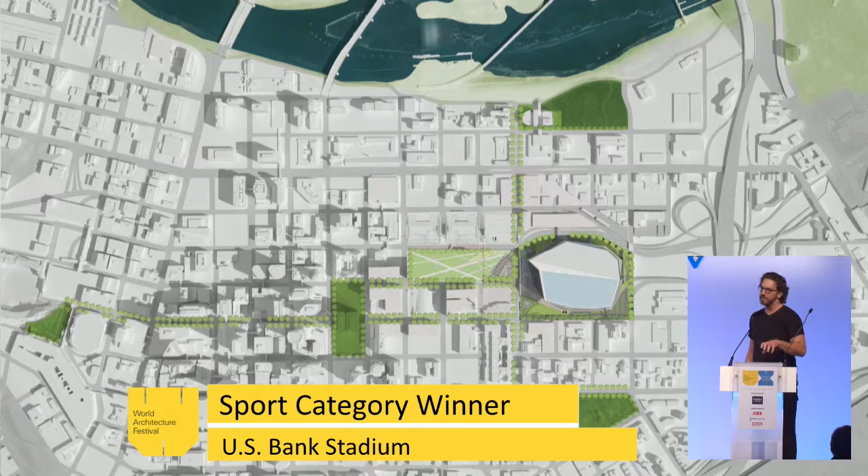But with that, it also had an amazing location and opportunity where we were located on the eastern edge of the downtown core. We could really utilize this project as a chance to revitalize and renew that area of downtown. We develop projects through two separate avenues of research. Market research, where we look at demographics to right size the building and make sure that we have the accurate seat count. And this idea of brand research, which I'll touch on throughout the presentation.

As I said, the project givens: we were designing this building for Minnesota, Minneapolis, but also the Vikings. And through a series of research topics, what we really tried to distill down to was the essence of what was important for this community. It was really about building a stadium that had the essence of the people in mind, knowing that it was home to very diverse and influential people.

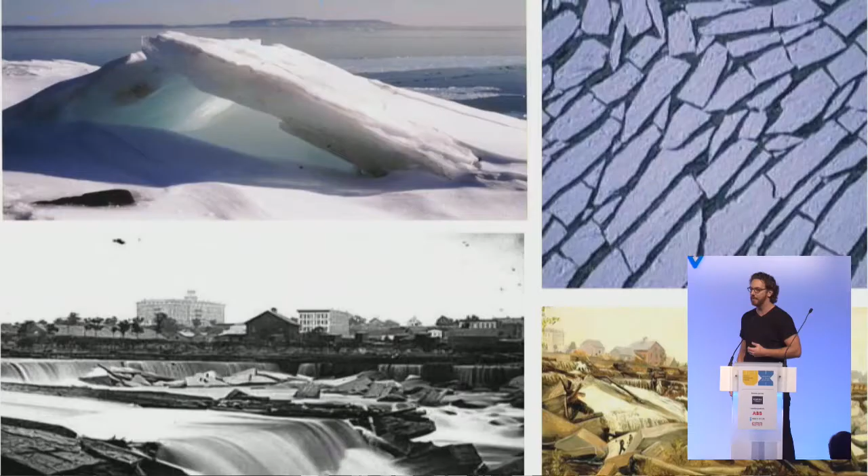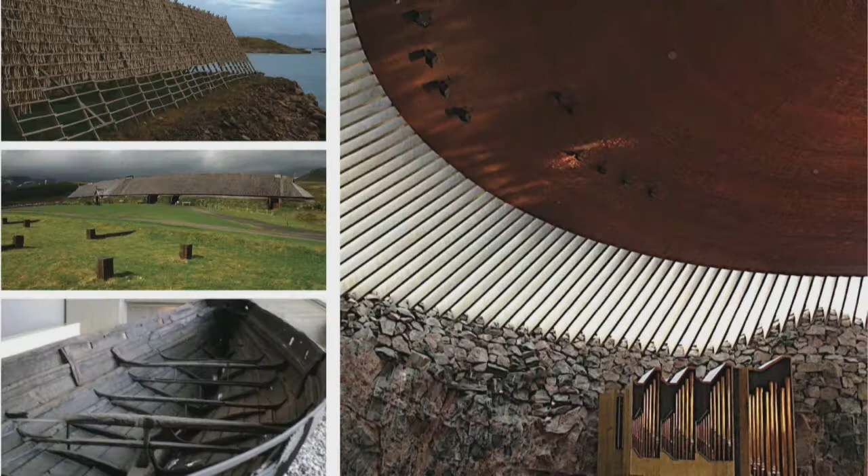And so what we did was we looked at the fabric of the city itself. It has a very rich architectural history in Minneapolis. But it also has a strong geography and geology as it relates to its proximity to the Mississippi River, and also the way that ice forms and breaks apart through the winter and the spring. But also looking back to the old world, knowing the influence of the team itself and where they came from.

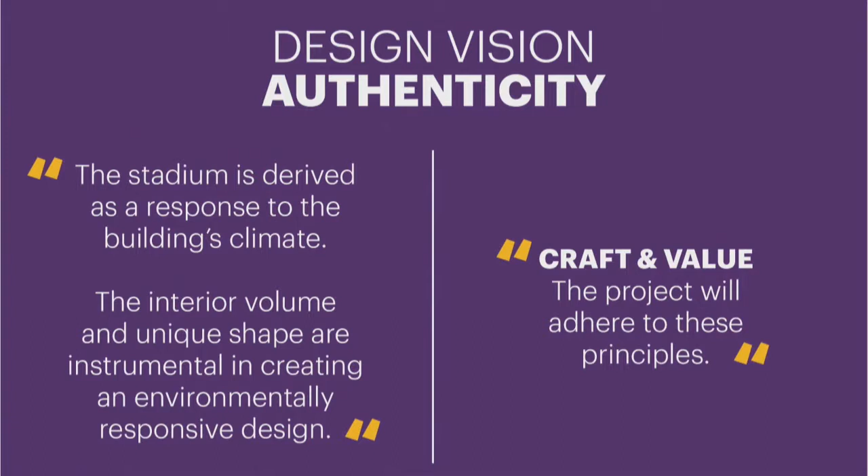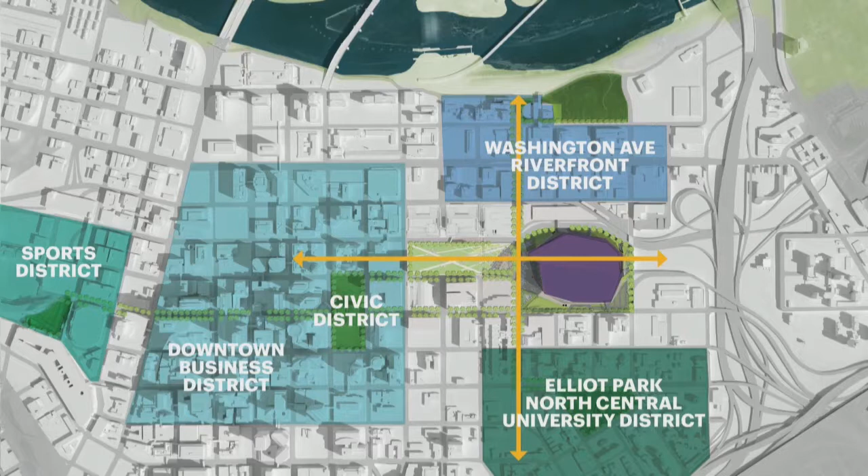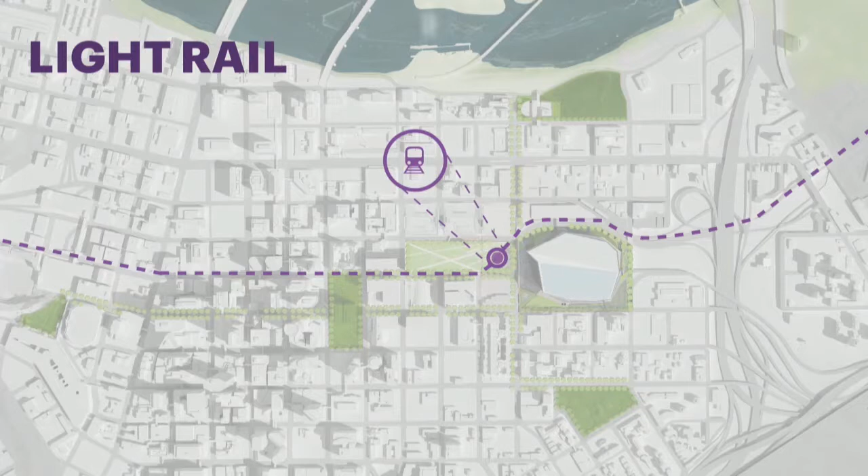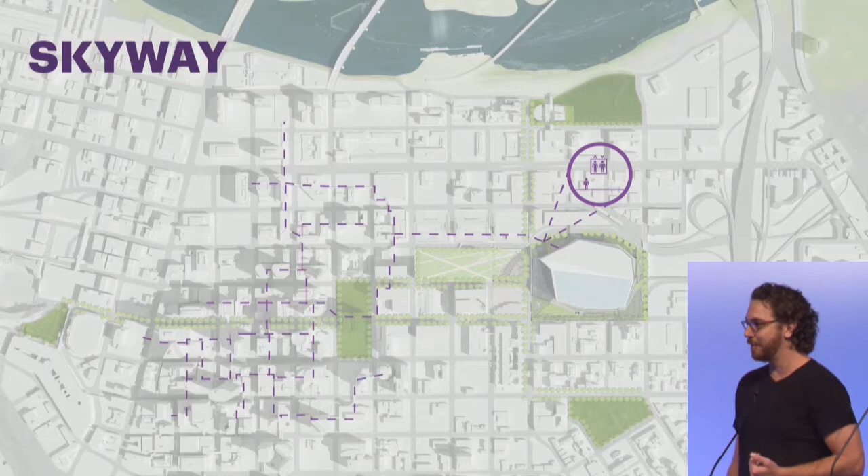And so through that vision, what we decided was really important was this search for authenticity in the design through avenues of craft and value, but also a way that we could link the city together. We could link the downtown core to the stadium in a series of axes, link the park neighborhoods together with the stadium to the waterfront edge, but also really integrate into the light rail system of Minneapolis, and the Skyway, a series of 8 miles of elevated walkways that allows patrons of the downtown core to travel through the city without having to step outside when it's -10, -20 outside.

And so the form of our building was really derived by 4 main things. The first one was really dealing with this climate. The number one thing for us was, how do we get the snow off the roof? How do we manage the problem with snow on the roof? In the existing facility that the Minnesota Vikings played in before ours, a traditional stadium form, the roof collapsed due to the snow loading.

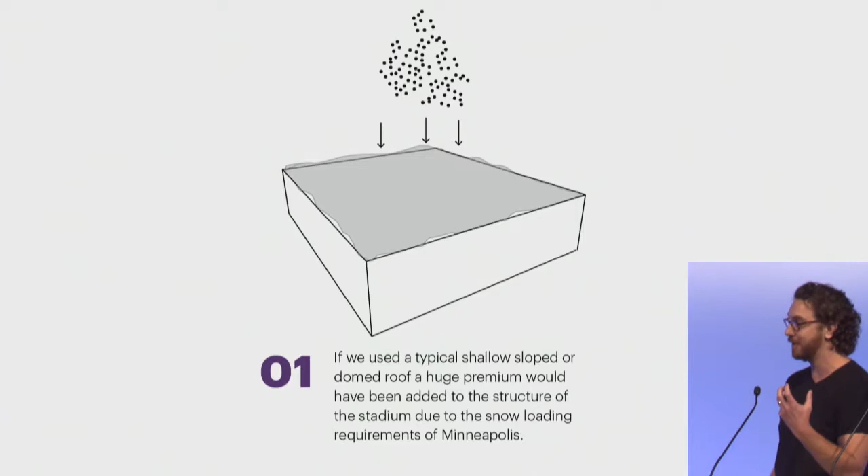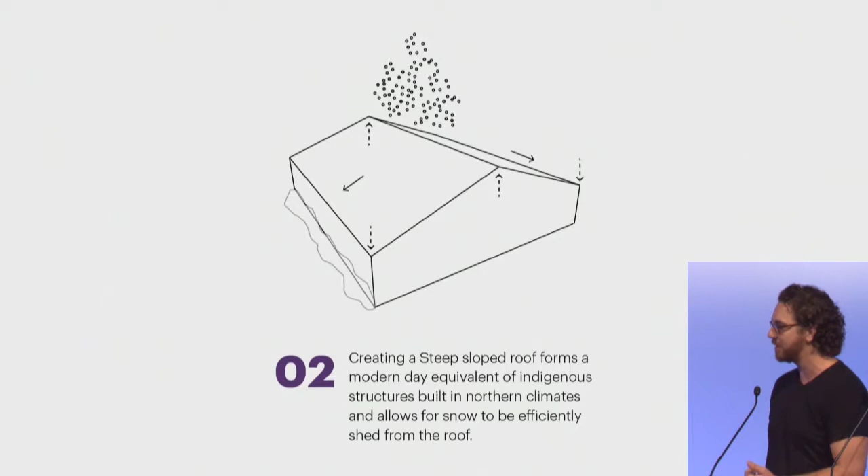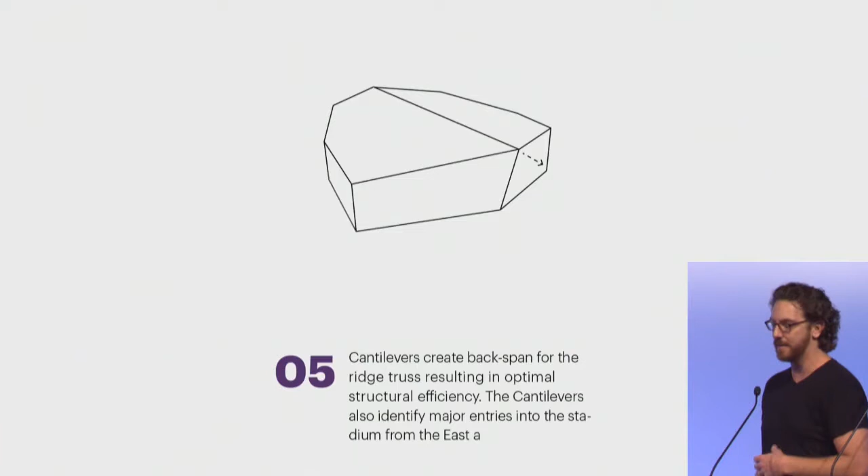So for us, it was a way to manipulate the form in a series of simple moves, looking back at the way you would traditionally design a structure in a harsh winter climate, to redirect the snow, maximize the southern exposure of the roof, and redistribute the snow towards the edges of the stadium. Knowing that we didn't want the snow to fall onto the ground, we created a series of catchment basins around the stadium that can collect and hold it. It manifested itself into a truly unique statement architecture, but one founded in pragmatic principles.

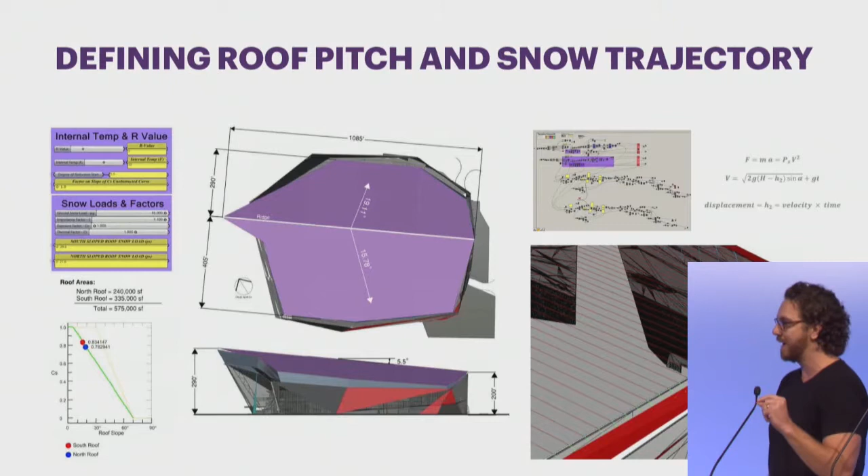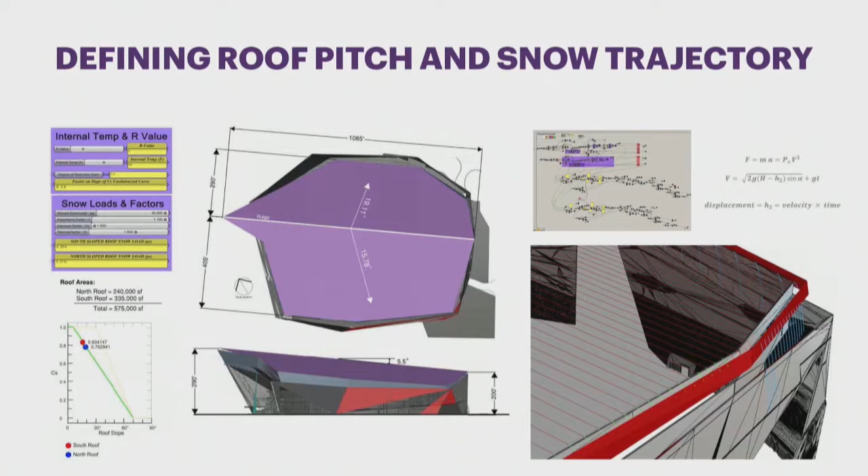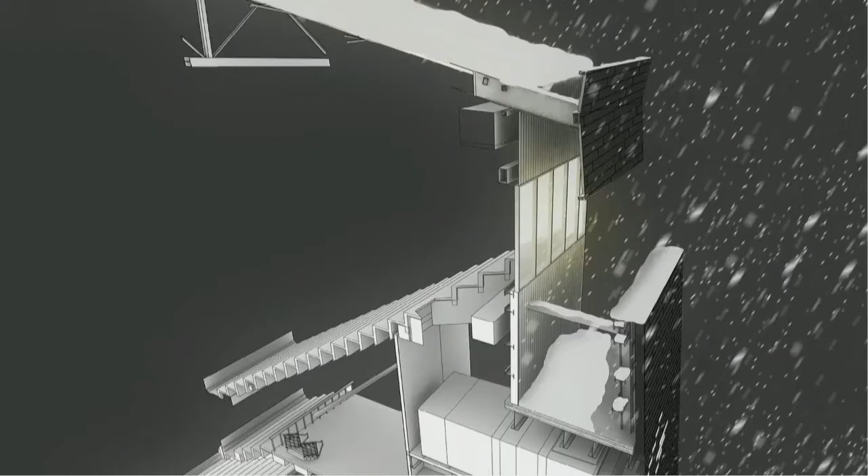We worked hand in hand with the contractor and structural engineers to parametrically define the edges and the slopes of the roof, to optimize them, making sure that each slope was designed at the correct angle, and also dealing with the trajectory of the snow as it comes off the roof. The catchment basin around the stadium was designed to capture a 100-year snow event. So it's a massive amount of snow, and as it breaks off the roof and slides down, it has to pass through what we call a deflector shield.

The deflector shield, as you see on the lower right-hand image, deflects the snow down into this catchment basin, and you can see the scale and the magnitude of what we had to deal with as it related to that snow.

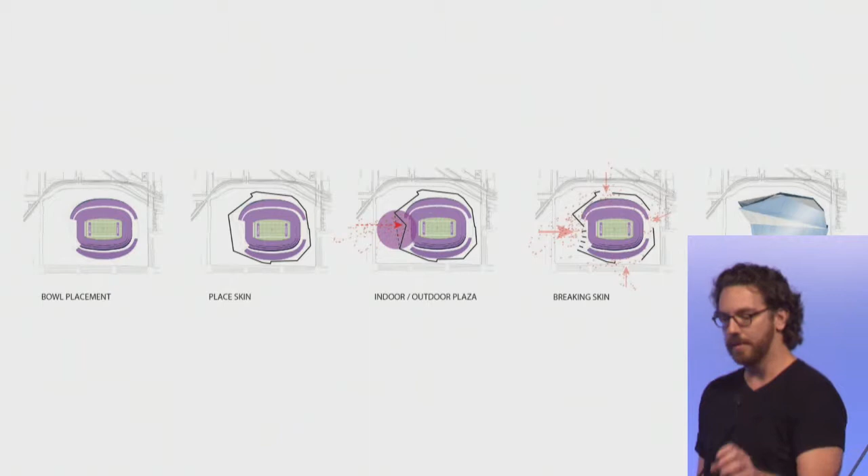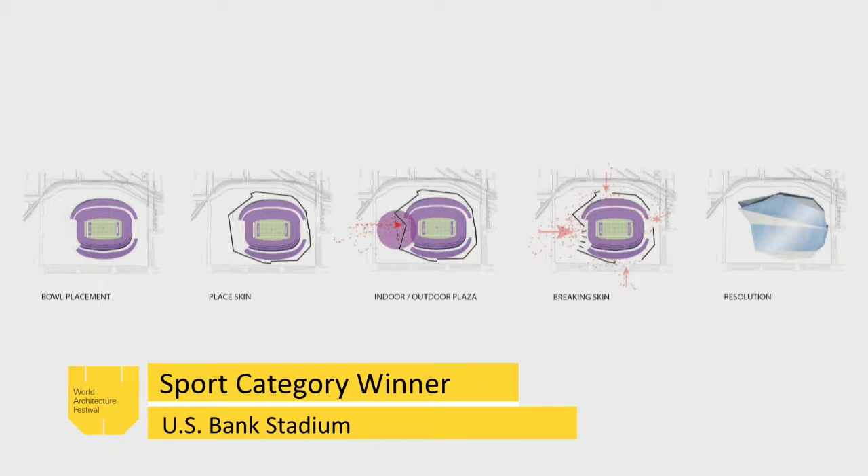From a civic response, the stadium itself opens up to the city higher on the west end as it greets the city to the south, and then lowers back to the eastern end as the city lowers in itself. And so from a civic gesture that's really symbolically reaching out, the bowl and the stadium was placed towards the eastern edge of our site, really maximizing that western location that was connected to the light rail system and also the Skyway, and in a way that about 65 to 70% of the patrons will come through this western edge.

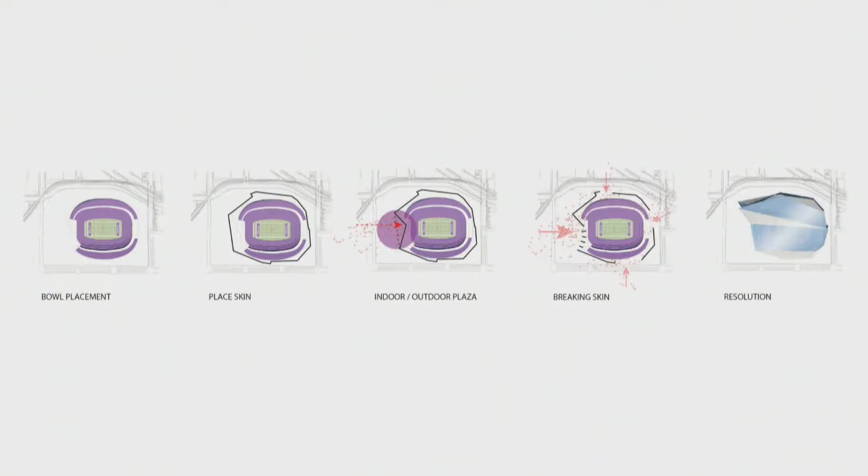And then there's secondary and tertiary entries along the 3 other sides of the stadium. But what it really does is it transforms that west elevation into a literal and symbolic kind of reflection of the community in which it was made, but also at a pretty grand scale.

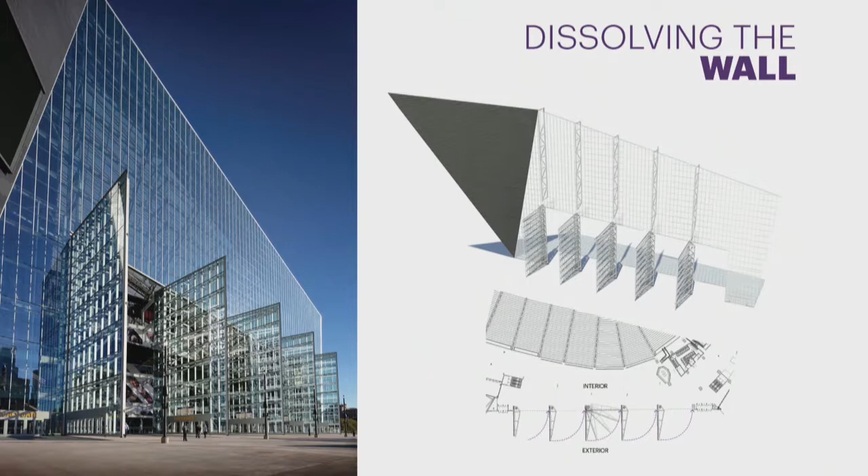So for us, it was a question of how do we welcome in all these patrons? How do we welcome 65,000 people into this stadium in a way that was efficient and had this gestural power? And so we did that with a series of 5 pivoting doors. Each one of the 5 doors varies in height from 95 feet tall down to 75 feet tall, each one of them 55 feet wide.

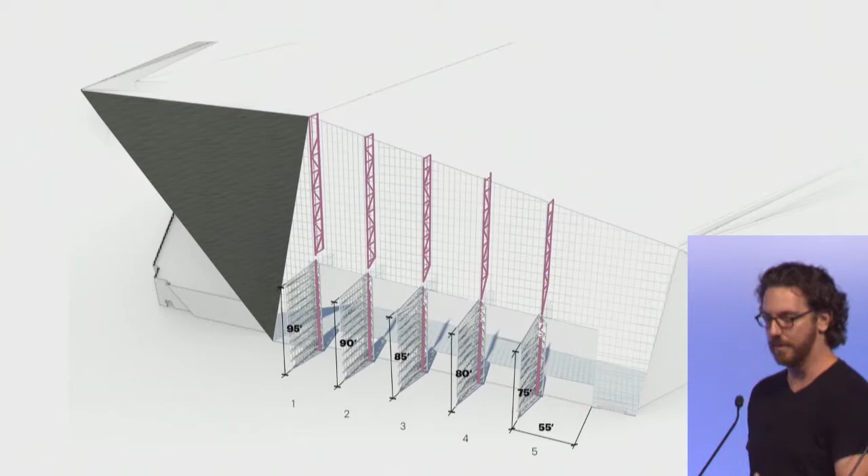And they also do 2 different things. They serve multiple purposes. The column around which the doors rotate also supports the roof itself, or aids in that support. And as you can see, at nighttime when the doors are closed, it still reflects that city. But then as they open up, they really welcome in and bring that energy of the community in through the stadium. But also as you're looking back out, it welcomes that city back into it.

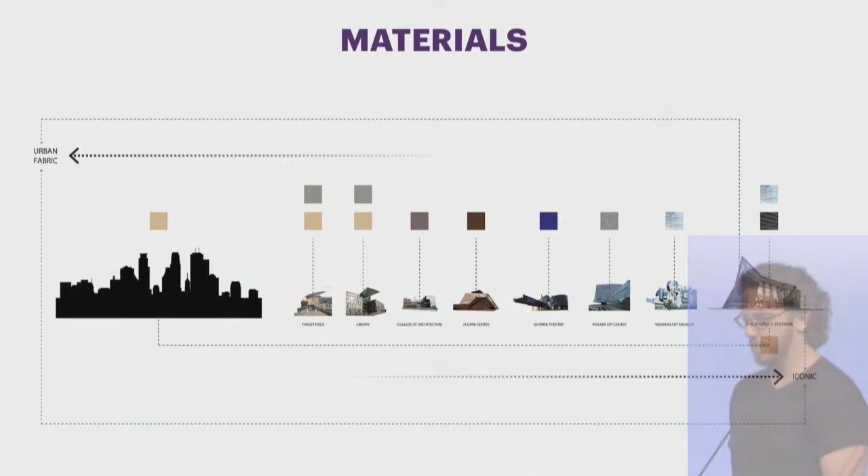This idea of the brand research was really a search of, could we find something in Minneapolis that was going to take us to the right place as it relates to materiality? But what our study showed was maybe we need to look back even further. We were really inspired by the traditional Viking longhouse and how it was clad in timber, and that timber would patina and age over time. So we clad our building in zinc, anthracite, that will continually patina and age as the building ages. It'll weather into a soft gray as the building transitions.

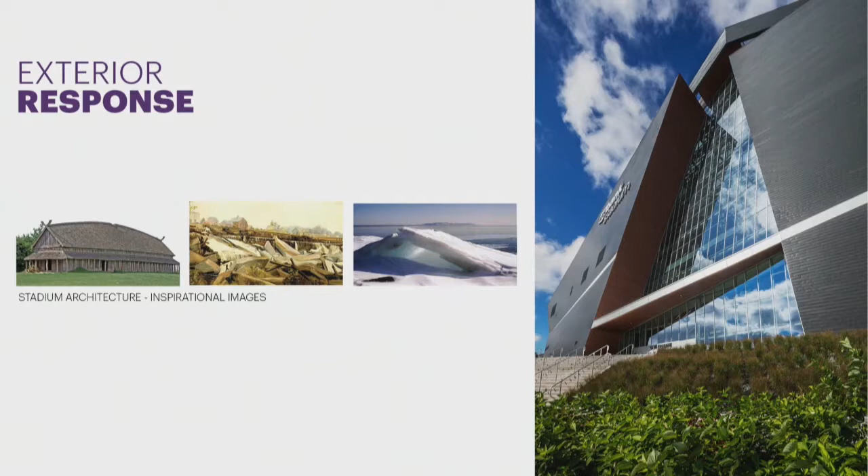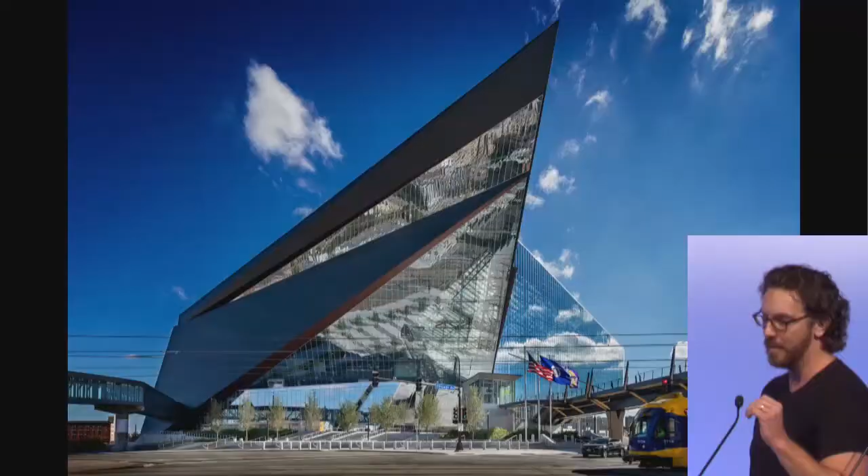But also the form was really inspired by the ice shards and this notion of the jagged rocks at St. Anthony Falls, to create these urban moments or realizations of this image in the form. And you get a striking complex when you're looking at it from a pedestrian scale close up, but it also serves as a great anchor to this public space that's in the foreground of the stadium itself.

And from a sustainability standpoint, we knew if we were going to be authentic, we had to be sustainable in the way that we do this. We started here with the interior of the bowl, and really the use of clear as the new retractable is what we sold the project as. The NFL had a fascination with a retractable roof; all the new stadiums had to have one, but we wanted to sell the idea that we could give you everything you wanted out of a retractable roof by allowing the natural daylight to come in, which really reduces the need for artificial light. You'll notice there's no lights on in this image right here. This is completely daylit.

It also helps in the snow management of the building. The heated air rises up, and it actually becomes a passive snow melt system. And then the stadium seating bowl itself is completely bespoke for different situations of functionality, so we can play baseball, soccer, football, of course, X Games, motor events.

And as you look at it from a structural standpoint, with the loft of the stadium and the ETFE, we were able to take what traditionally in stadiums would be 2 massive trusses and super columns going around and reduce that to 1, which ultimately reduced the carbon footprint of our stadium and the steel tonnage in the project.

And so we knew we were making big moves with this form, and how could we use those to our advantage to create this ultimate machine. So we used the loft of the stadium itself in the wintertime to actually create a heat reservoir. And then we have a series of 4 vertical heat and air risers at the ends of the stadium where you can capture the heat and redistribute it into the lower areas of the stadium where it's needed.

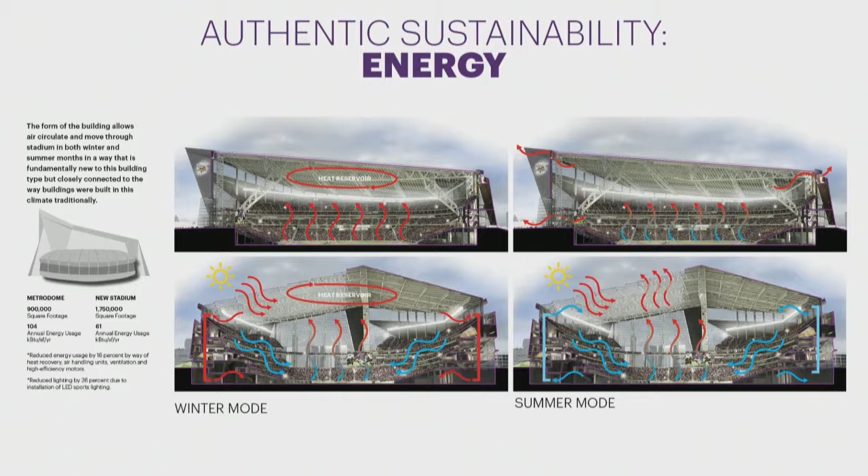That process is reversed in the summertime, where the cool air that is distributed down to the bowl gets redistributed into the upper areas, and the hot air is released out through the high ends of the stadium to promote that convection. But I think perhaps the most important thing that we were able to do with this project was actually one of urban renewal.

The project itself spurred the development of almost 1.2 million square feet right now in a traditionally derelict place of downtown Minneapolis. And then also it instigated the design of a public park, a 3-city block public park.

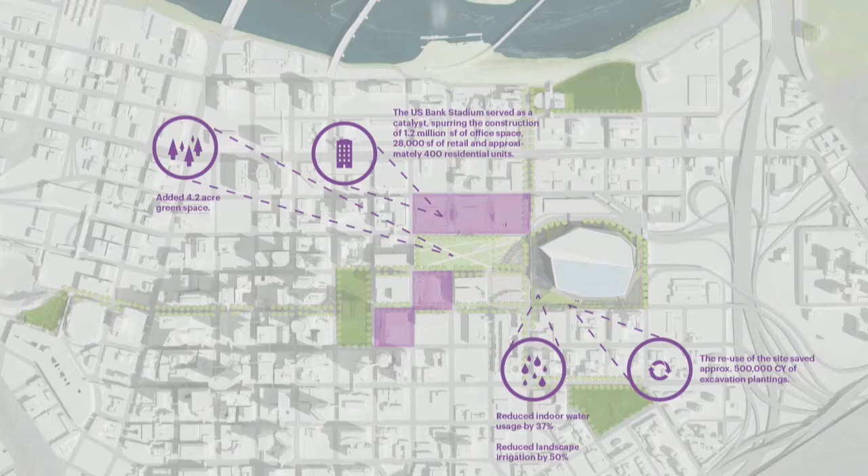And what we've done on the inside of the stadium was bring things traditionally found in your home into the stadium to capture the imagination of the fans as they enter into the space, bringing them closer to the game itself and closer to the team and the action.

And so I'll leave you on this slide, and I actually had the pleasure of standing about right here when the Vikings used this for the first time. 2 of the teammates were walking down, one slapped the other guy on the shoulder, and it was like, man, we're home. And it was such a great feeling that something that was so very different and abstract in so many people's minds actually transformed into something that was quite familiar. So thank you.

Thank you very much. Ian? Oh, I thought I heard Ian. Okay, yeah, you go, it was first. Ian, it's you. Okay.

Just curious, in terms of the capacity, you said 60,000. How far is the furthest spectator from the pitch? The highest seat in the stadium is actually closer than you would think. The traditional stadium seating bowl, like if you think about the Rose Bowl, the Coliseum, the bowls are laid back quite far, so that the spectator in the last seat of the last row is actually...

Any numbers? The specific number? No. Yes, exactly. In the section, yeah. So it ends up being, you know, in the 100 feet range when you break it down. But it's quite a bit closer than a traditional stadium because we broke it down into many levels, and that pushes you closer to the stadium itself.

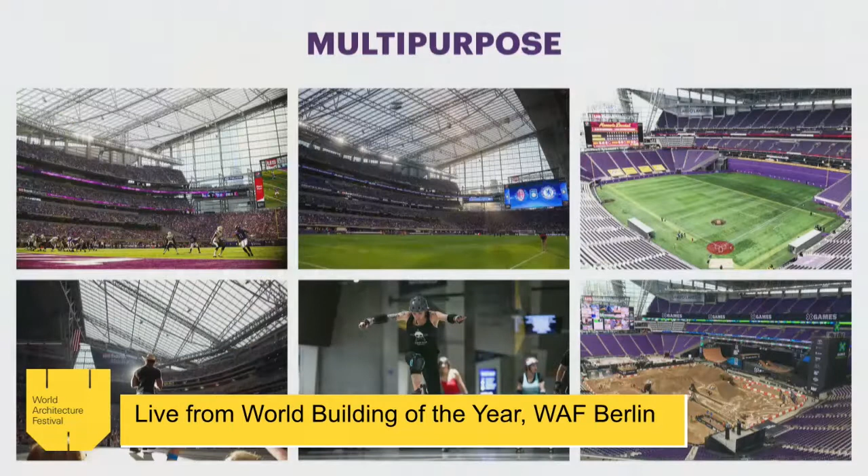Just a question. The grass, is that natural grass or artificial grass? It's artificial turf, and that was for the multi-purpose nature of the project. If you have natural grass and you put an event on it, like a concert or a tractor pull, it actually kills that turf, so you have to keep replacing the natural grass. That's the European problem we have, yeah. Yeah, and so if you see an image like this, where all these events take place in the stadia, it was a way for us to efficiently transition through different event types without the waste of natural grass.

How do you cool down this stadium? What is your source of cooling in summer? It's traditional air conditioning. We have the traditional tonnage. We tap into the infrastructure of the Minneapolis line, so it's a traditional HVAC, but we supplement that with the idea of the vertical risers, so it's an active-passive system. So basically, it's a fully climatized stadium. It is. Really?

Can I just ask a question? Sorry. How hot is it going to be in summer? This is the second year it's been in, and it's actually quite fantastic. No, I mean the climate in Minnesota. What is the temperature in the summer? They can control it to whatever they want. Outside? Oh, in Minneapolis, it gets to the low 90s. I think that's about the max that we designed to. Low 90s? Well, that's Fahrenheit. Sorry. Oh, we only understand Celsius here. 35. It's not so hot. Yeah.

It's a lot colder than the Middle East. I know, it was a lot colder than the Middle East. Well, one of the debates that we had was the ETFE on the southern exposure, and we had to do a lot of modeling and proving out through CFDs that it actually was going to create a pretty comfortable environment.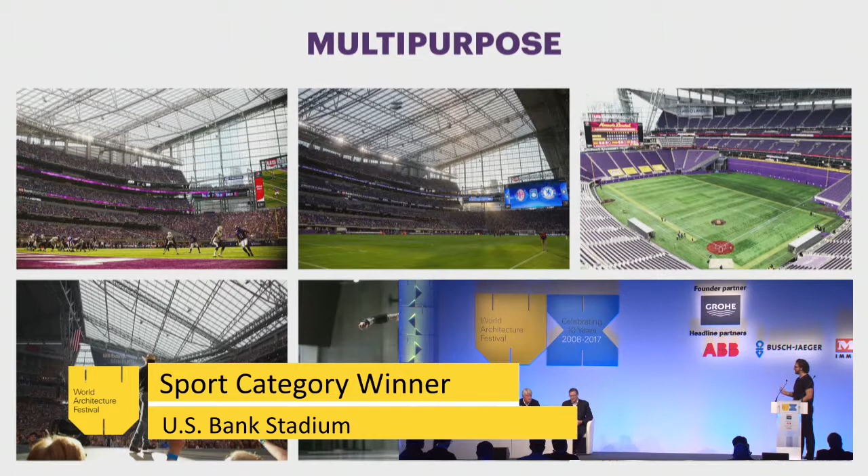Your analysis of the snow load and the behavior of the snow that lands there, when it slides off and goes into your troughs, are the troughs heated? Yeah, we do have snow melt at the base of the troughs. The ETFE can resist the force of sliding snow because it's a cushion, no? Yes, it's quite a resilient material. It is a 3-layer ETFE system. At the edge of the roof itself, it's supplemented with snow cables. The cables are spaced every 2 feet on center, right at the edge of the roof where the load is at its highest before it hits the deflector shield.

And is that season all year round? I mean, do you do breaks in the summer and in the winter? Yes, it's all year round. There are breaks? I'm sorry. I mean, the season, is that all year round, or is there a break in the summer and a break in the winter? Oh yeah, the sports team. Yeah, the building itself is utilized all year round.

Because the NFL is in the fall and the winter. The baseball is in the spring, and then they use it for all sorts of events throughout the year. So it's not just a stadium, it's an arena, it's a kind of indoor space. Yeah, actually the middle image here in the bottom, the citizens can actually go in, they utilize the concourse in the wintertime to roller skate or run, to jog. It's quite interesting.

And may I ask another question? Sure. It's a huge animal, right? Yeah. What did you do to scale it down for human perception? So for us, the idea of entertainment and sport is there is a little spectacle to what you do in sport. And so we utilized this as an opportunity. Everything we did had a reason. It was all about creating this ultimate machine. But in essence, when you go to a sports event, you want to be entertained and inspired. And so we used the architecture as a chance to do that, to tell a story and actually have people start to question what a building or stadia should be.

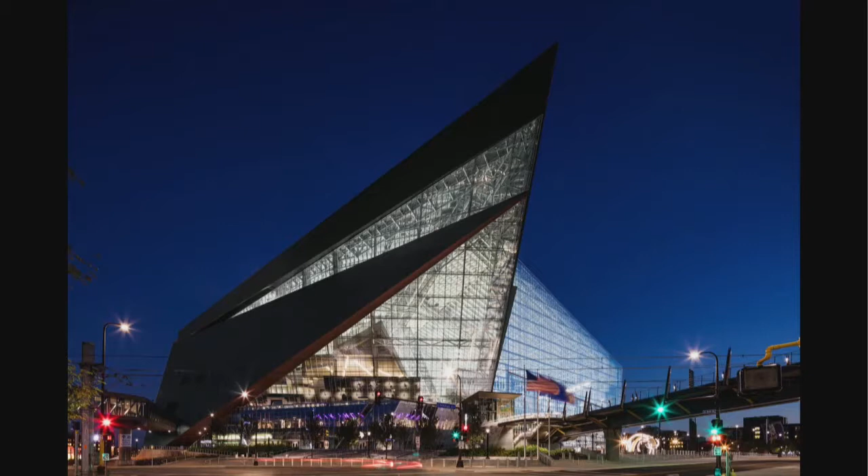So where did they put the stage when there's a rock concert? They put it at the end, right here on the western face. On the western face? And how do you then get all the trucks in and all you need for your gig? That all comes through on the eastern edge of the stadium, through the back. Okay.

Is there more music in the stadium than sports, or what is the relation? No, it's more sports. They probably do 5 to 6 big concerts a year. 100,000 people will come to see a concert, but those are more isolated events. The sport itself is 10 games at a minimum, and then there's so many other functions that happen in the stadium, from weddings to bar mitzvahs. You wouldn't believe the amount of utilization that the city gets out of the stadium.

How much did it cost? It was a little bit over $1 billion. Sorry, $1 billion? 1 billion, yes.